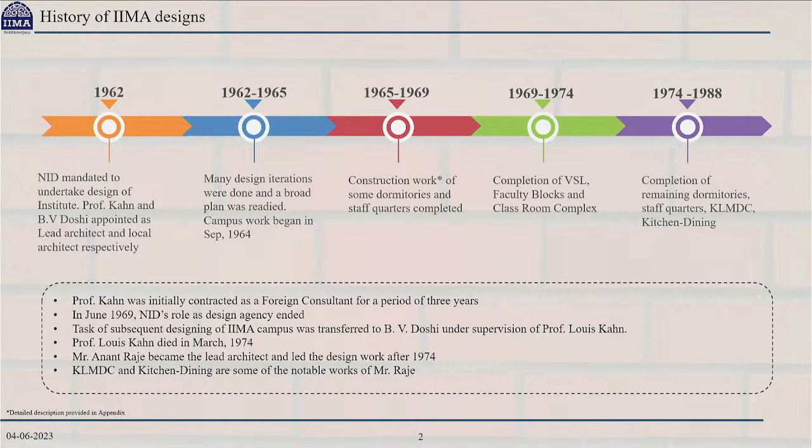Somewhere in 1974, unfortunately, we lost Professor Louis Kahn, and Mr. Anant Raje became the lead architect, leading the design from '74 onwards. Between '74 and 1988, we completed the KLMDC center, kitchen and dining area, and so forth.

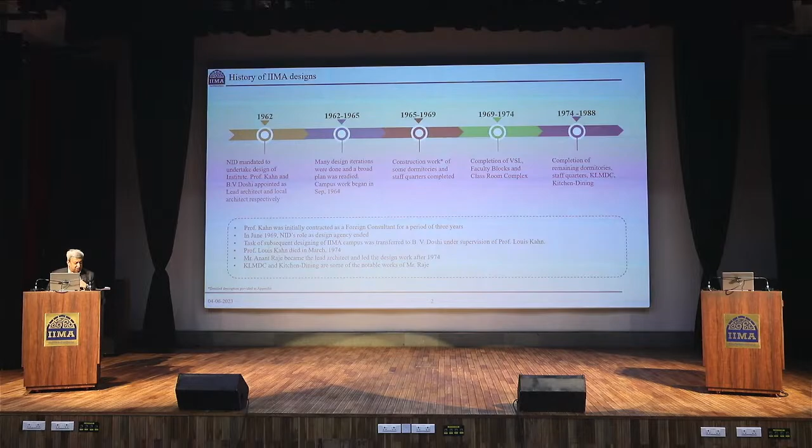So I think a lot of effort has gone behind creating this iconic building which we all see, and the legacy left behind by these people. We inherited a great infrastructure, and the institute became operational.

I met some people who were in the first or second batch here, and you all know that we were actually being taught in a tea shed at that moment.

So the sketch which was prepared in 1962 - if some of you visit the archival center today, you will find an actual picture of this sketch there. That sketch was the initial concept which was prepared.

It was driven by the convent building style, with more open areas that could be created. This was basically achieved through meeting and interaction areas, much larger passages, and collectively a lot of open areas. And finally the Louis Kahn Plaza came in, which we are all very, very proud of, and where a lot of our convocations - most of you have attended the convocation in the Louis Kahn Plaza.

So I think over a period of time, this design itself has become symbolic for IIM.

The problem started because of the bricks which were used. The first version which Mr. Kahn prepared was requiring an RCC building to be built. But the local Ahmedabad thinking, and the Indian thinking, was that bricks should be used more, not that.

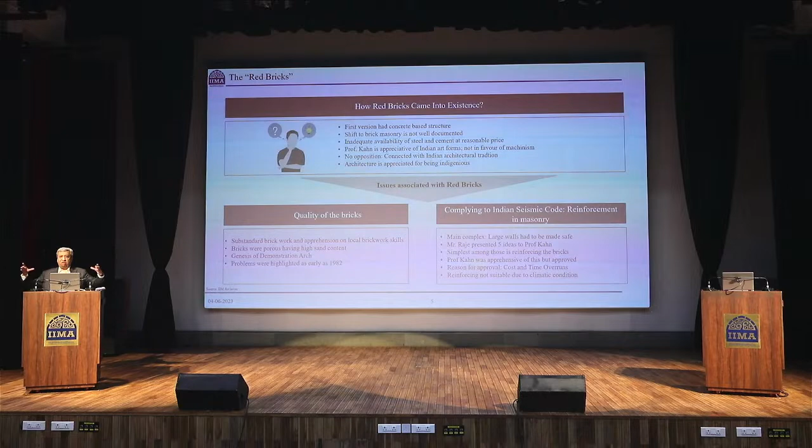When this brick structure was being created, it required reinforcement. So Louis Kahn suggested that while making a brick wall, you put four bricks in such a way that there is a hole in between. You put the rod into that and pour concrete.

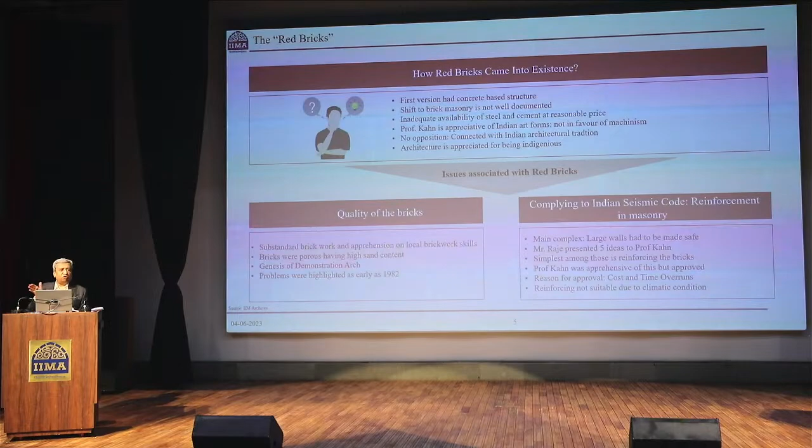At every period, something like 3 or 4 feet, you run a vertical small coping to make sure the structure becomes straight. At that time, cement and steel was very difficult to get in India, and it was expected the cost would go up. In the wisdom of everybody there at that time, they decided to go ahead, and some advised that only putting a rod will serve the purpose. Now the problem is the bricks in Ahmedabad were made out of sand and clay, and they are very porous in nature. Over a period, water seeped through the bricks, and the steel rods got eroded. Some of them protruded out, and that created huge damage to the whole building, including the top slabs, which had similar problems.

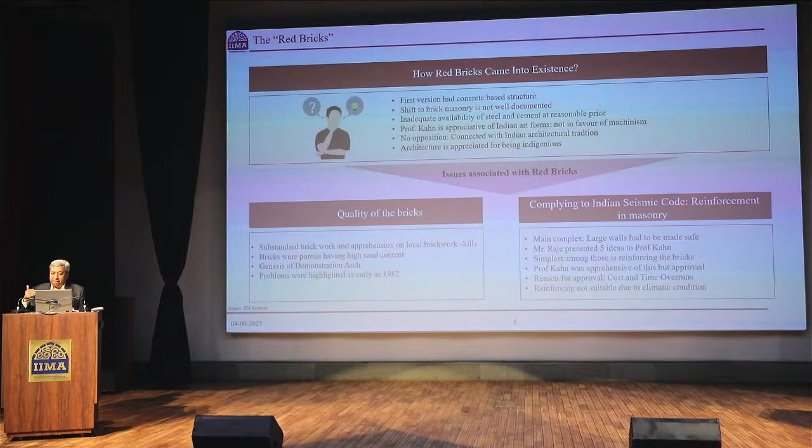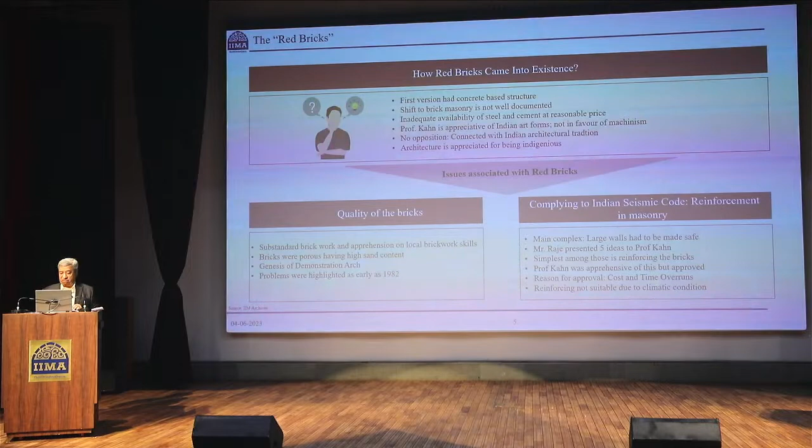Many things we can keep talking about, but the key message is we inherited a very iconic building, but unfortunately, because of the weather condition in Ahmedabad and the brick condition, the building started deteriorating in the first 10 years itself. In fact, in 1982 the building committee discussed the erosion. So since 1982 we have been talking about this problem. I don't want to blame anybody here. If somebody was not able to decide at that time, we are all responsible, because as senior concerned citizens of this institute, we should have helped them take the right decision, or even if they took the right decision, it didn't happen.

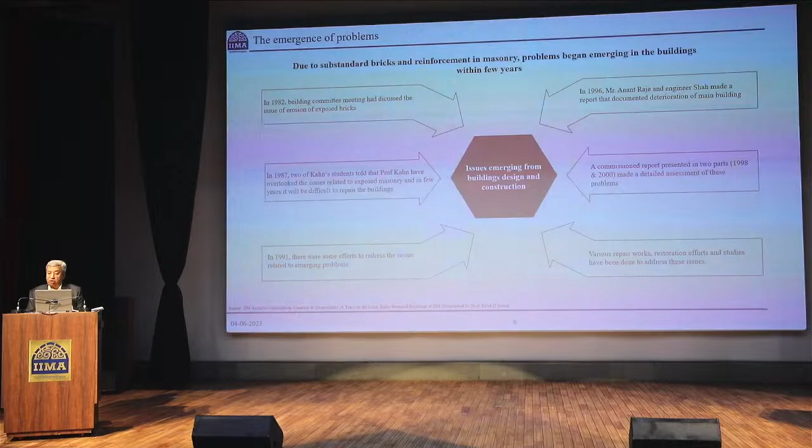Two Kahn students came in 1987, sent by Professor Kahn, to understand what's happening, and they said the exposed masonry would be difficult to repair in a few years. In 1991, efforts were made to redress the issue. In 1996, Mr. Anant Raje and Engineer Shah made a report documenting the deteriorating main building. Then we commissioned a report again in 2 parts, and so on, and every now and then some renovation work took place.

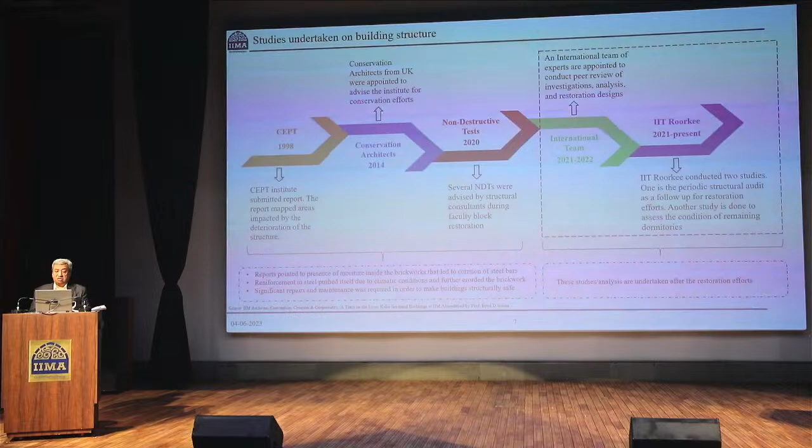We conducted several studies for the building structure. CEPT made a report in 1998. Subsequently, conservation architects from UK were hired in 2014, and they advised us with their report. Non-destructive tests were conducted in 2020, done as per the advice of the structural consultant at that time. An international team was invited in 2021-22 to have a look and suggest things, and in 2021 we also requested IIT Roorkee to help us with a report, and I'm happy they are here to share their findings with us.

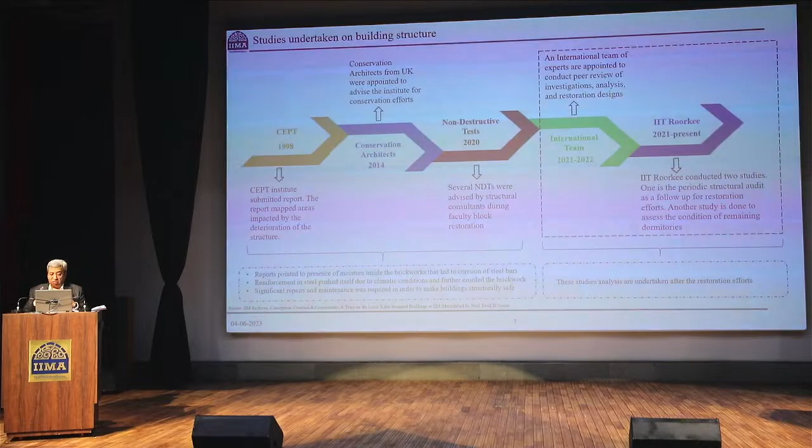Basically, the report pointed out the presence of moisture inside the brick, which has led to corrosion of bars. Reinforcement steel pushed itself out due to the climatic condition, and it has further eroded the brickwork. Significant repair and maintenance is required to make the building structurally safe.

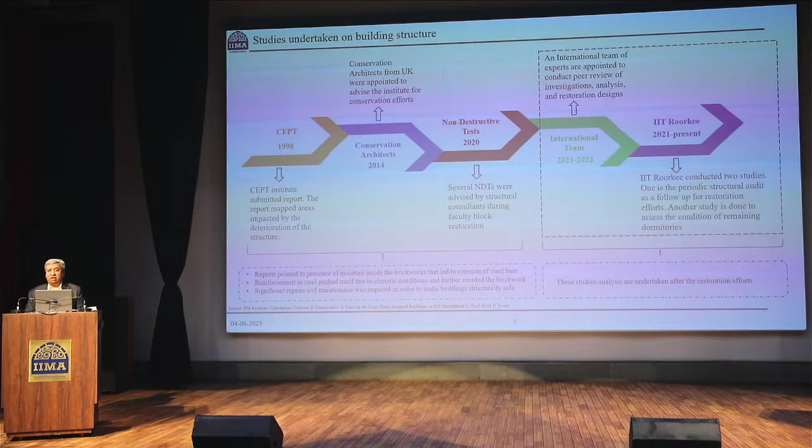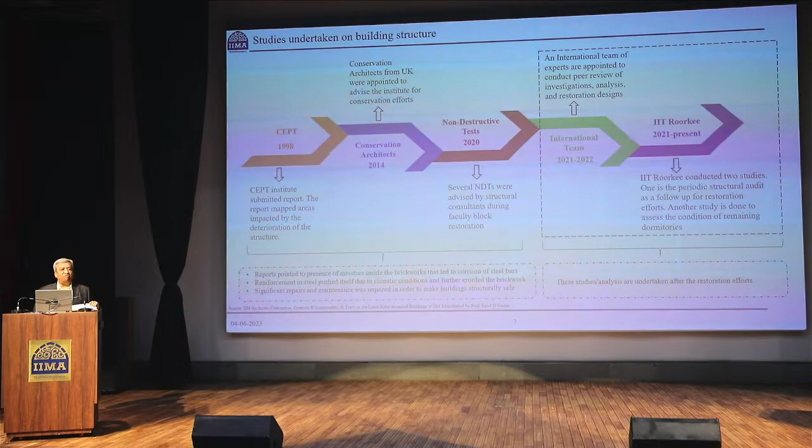These studies have ultimately said, and one thing I found in all those reports is everybody says this can be repaired - I agree, anything can be repaired. The question is nobody gives any guarantee whether it's good for 1 year, 2 years, or 3 years. They say no, after that you have to keep on maintaining. Now I personally, not being an engineer, don't understand, but some of you might be able to understand that you can't keep repairing and maintaining forever - someday the building's life will get over according to all these reports.

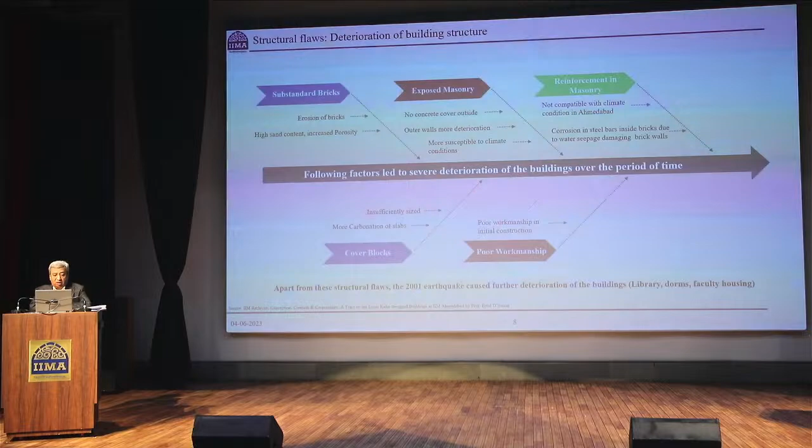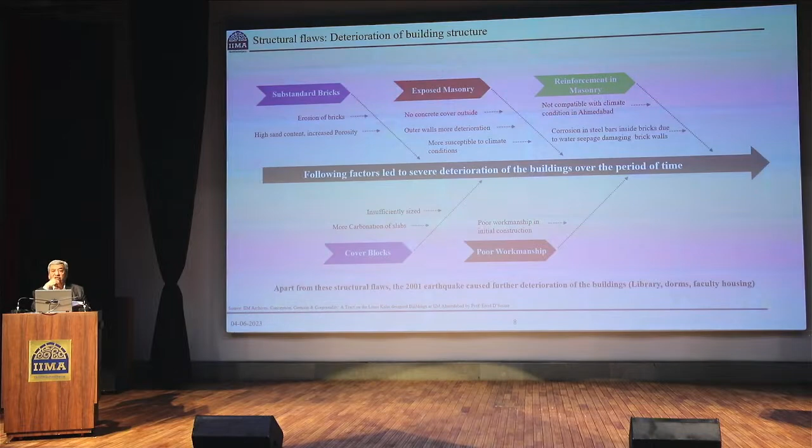But if you see what happened - library east and west side, an 8 foot wall cracked and fell. Service tower main arches at 90 feet height cracked and fell. Dormitory building staircase roof slab fell and walls were cracked. Dormitory building shaft wall cracked and fell. Extended parapet wall of faculty housing cracked and fell, and cracks were observed in various other areas. So this is how the concern started about the safety of people occupying this building.

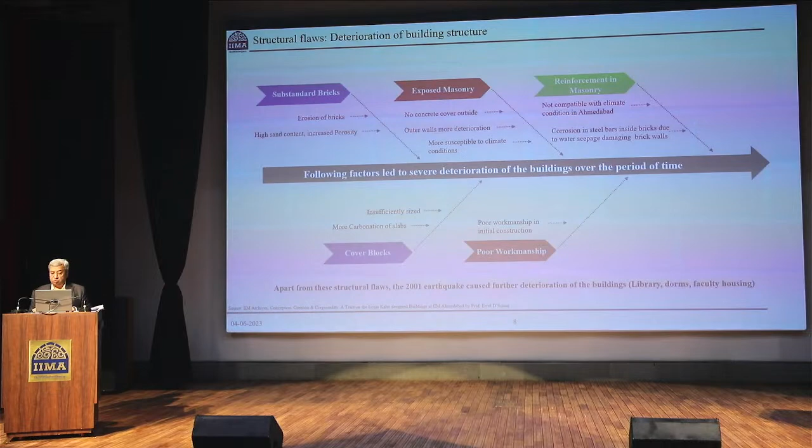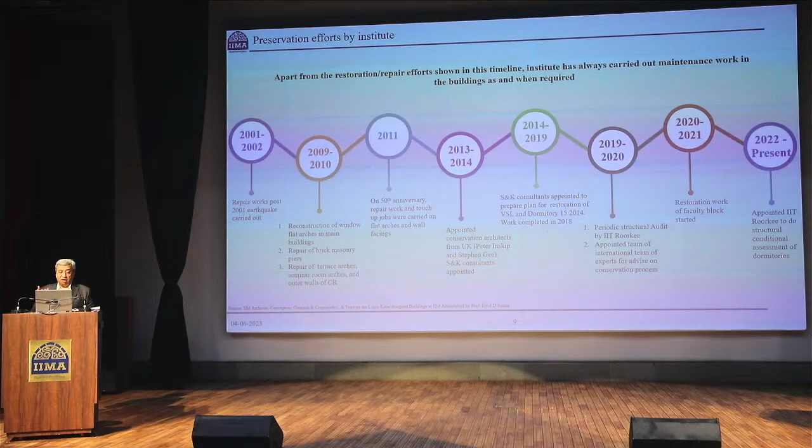Apart from the restoration efforts shown in the timeline, we also carried out maintenance work of the building at various times. For the past 2 decades, instead of one-time fixes, regular repairs, maintenance, and restoration efforts have been carried out, and this chart shows that repair works were done in 2001, reconstruction was done between 2009 and 2010, 50th anniversary repair work was done again in 2011. We appointed a UK consultant and S&K consultant were appointed for restoration. S&K consultant worked between 2014 and 2019, 5 years, to restore Vikram Sarabhai Library and one dorm.

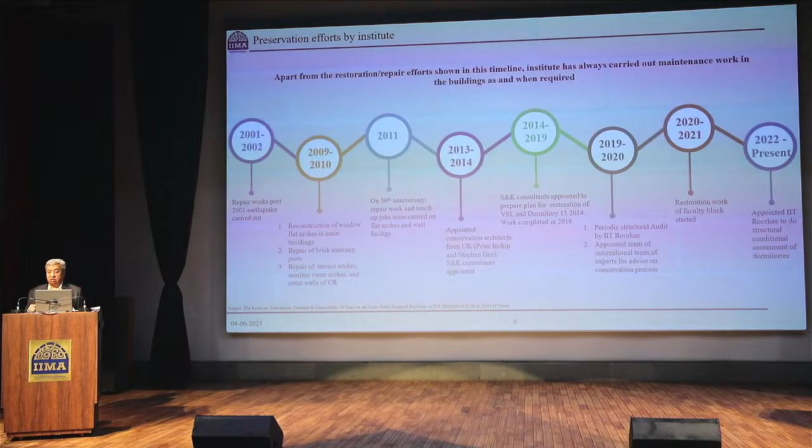Restoration work of the faculty block was also taken up in 2020-21. We found so many issues and problems while doing this, so we commissioned IIT Roorkee to help us understand this more. Now I want to show you some pictures to help you understand.

If you see here in this chart, this was the situation before restoration work done for the Vikram Sarabhai building. There were problems, cracks and whatnot, and then we decided that we'll do it. After restoration, within one year, we started getting cracks.

If you see here, some marks here, all of these are pipes put inside, and through that we are injecting to keep the building alive. And you see this thing, when this started happening, the restoration architects put support.

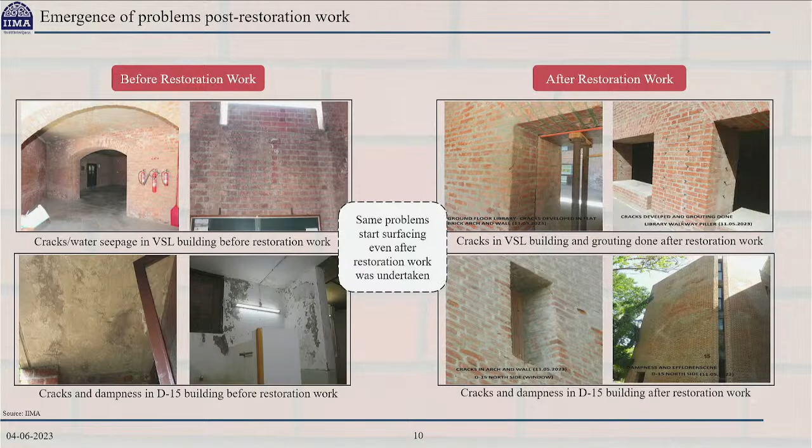This building had restoration done, and after some time it happened again, even with the D15 building as well. So we found that in spite of restoration, a lot of things happen. If you see, when restoration was done in the VSL building...

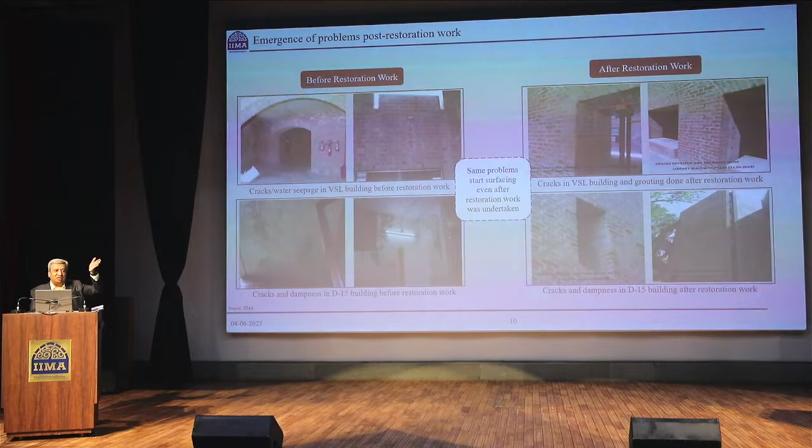Actually 2 slabs were broken. Half of the walls were broken, and new slabs were cast, and the walls were also constructed. So you could say it was rebuilding combined with restoration which was done, and in spite of that, we still have problems with that building.

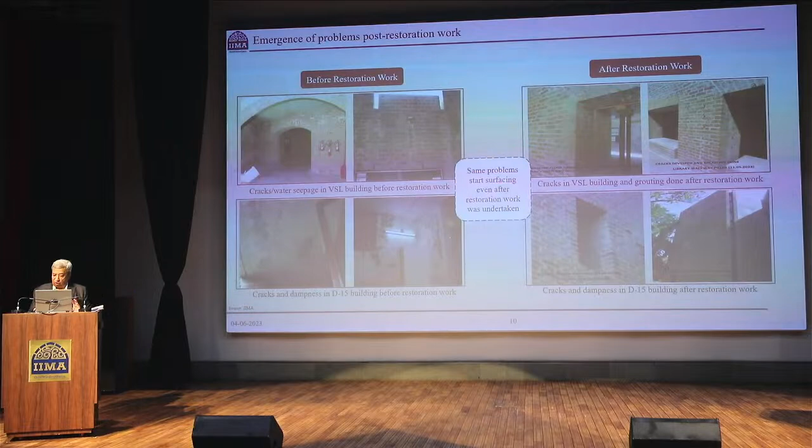Because of unsatisfactory work, we basically asked IIT Roorkee and also an international team to help us understand what we can really do. And the summary, as you see here, is that it's difficult to keep an architectural building intact and keep the building safe. Restoration will be technically impractical and ineffective, as we've seen now.

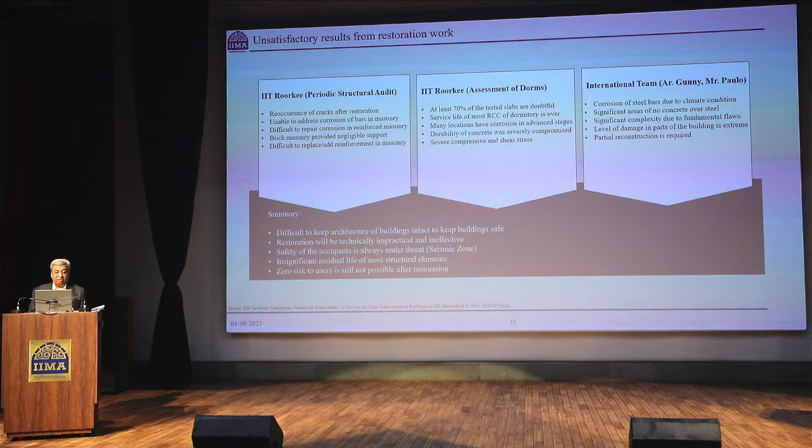We are now in a seismic zone. Ahmedabad is considered zone 4 now, and as a result, it is important to note that a severe earthquake can hit Ahmedabad and create a situation which could be dire. So ultimately, safety is becoming a major concern for all of us.

Now we need to really see and discuss here today what we can do. I have no fixed idea. If there is a great idea which is practical and safe for everybody who lives here, we are willing to adapt. Of course, we all have to understand that something very interesting happened, and I must tell you this.

You must know this. When the faculty block restoration work was started, there was an architect appointed earlier, and they had a structural engineer with them. Halfway through the building, when they saw that the VSL building had some problems, they changed the structural engineer, and a new structural engineer came in with completely different recommendations.

Every classroom, they told us to put 16 pillars inside. Now we said, if you put 16 pillars in the classroom, what will be the status of the classroom? What will happen to the people who are studying? So all these issues started coming up.

Not only that, the cost estimated by them was around 8,700 rupees per square feet. Now all of you know in your wisdom how much new building construction costs. So it was, of course, a solution which was not foolproof, because thereafter the same issue arises - you have to continuously maintain, you have to have a good maintenance program.

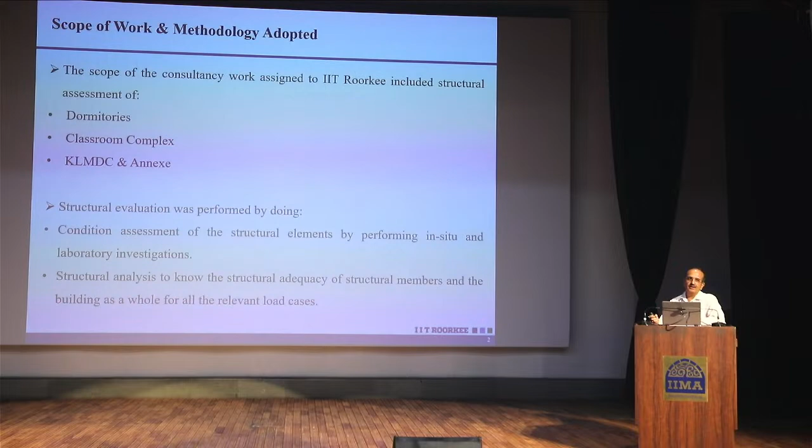The scope of work assigned to IIT Roorkee is shown here. It involved structural evaluation of dormitories and classroom complex building, and then KLMDC and its annexes. But let me tell you, this was awarded to us in the beginning of 2022, but before that we were also involved in some way in the other buildings as well.

First, around 2019, somebody called us from Ahmedabad or Bombay that they wanted some tests done on the faculty block also, because at that time the restoration work of the faculty block was going on. So we did some tests on the faculty block, and we have a fair amount of idea about its condition also.

Then in 2020 or 2021, we were awarded the work for periodical or routine assessment of two already restored buildings, the library building and dormitory 15, because the consultant employed to design the restoration started with dormitory 15 and the library. When it was completed, they mentioned it should be visited or inspected every 2 to 3 years as part of periodic assessment.

Towards that end, we were asked to do investigations on the library building and Dorm 15 also. So we have a fair amount of idea about the condition of these two buildings also, what was there before restoration and after restoration, how they have been behaving.

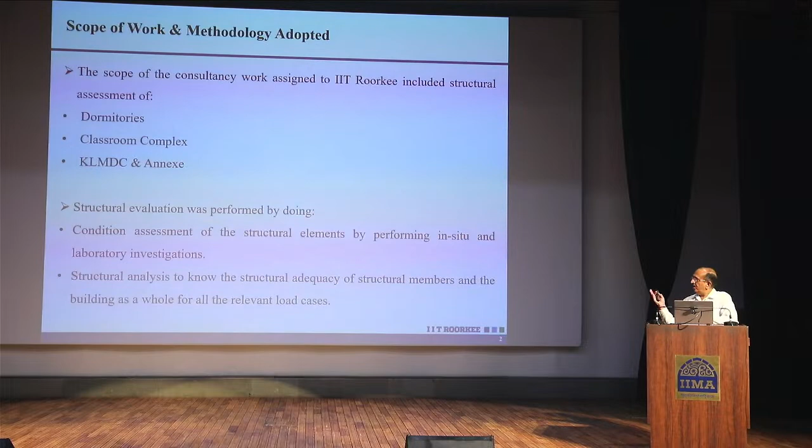For these three categories of buildings, we have done detailed investigations. Till date, we have completed dormitories in all respects, and right now we are doing investigations on the classroom complex and KLMDC, which is still underway. So overall, we have got a proper idea about the structural condition of all the buildings in the old campus of IIM Ahmedabad.

So how did we proceed? What was the methodology adopted? As you can see, in any old structure, when you are asked to do structural assessment, there are two main components of that study.

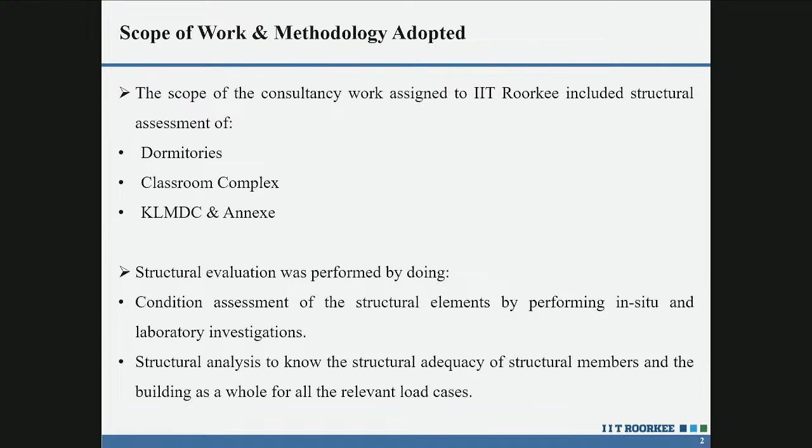One is to investigate or determine the structural soundness of different elements of the building, and the building as a whole, meaning whether any deterioration has happened. Aging will happen, but has it occurred beyond acceptable limits or not? In other words, you can say understanding the health of the building. That was one part of doing assessment.

The second part is to check the structural safety of the building as a whole under all load cases, meaning gravity loads, dead loads, live loads, and all lateral loads like earthquake loads, wind loads, maybe some other kinds of loads. That is always the second part.

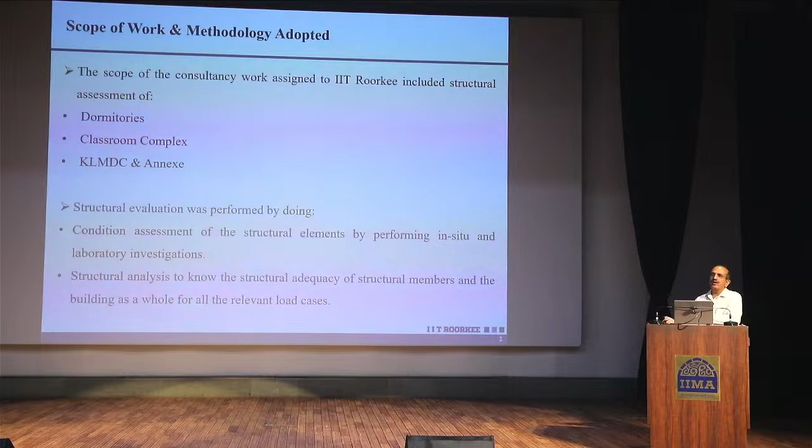Once these two things are done on any existing building, then you can say with all confidence that this building is safe or needs some kind of repair. The entire idea about the overall condition of the building can be gauged after doing both of these things.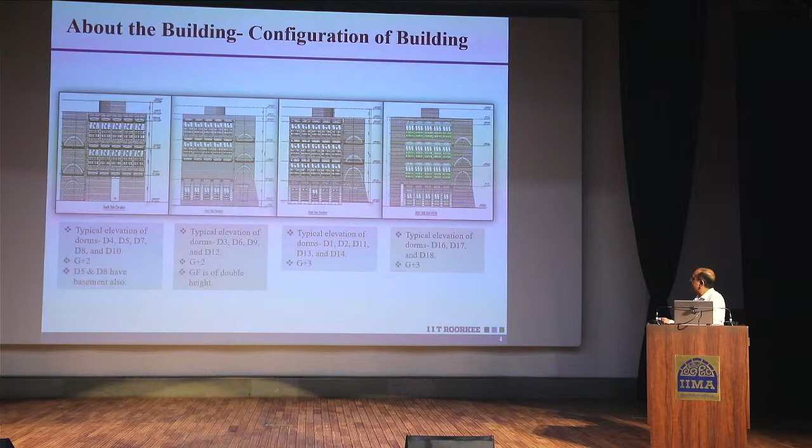In D3, D6, D9, D12 they are also ground plus 2 stories, and they have a ground floor which is of double height - you know this better than me since most of you have lived here. The typical elevation of the other dormitories is ground plus 3, and the same applies to 16, 17, 18, which were built slightly later, also ground plus 3.

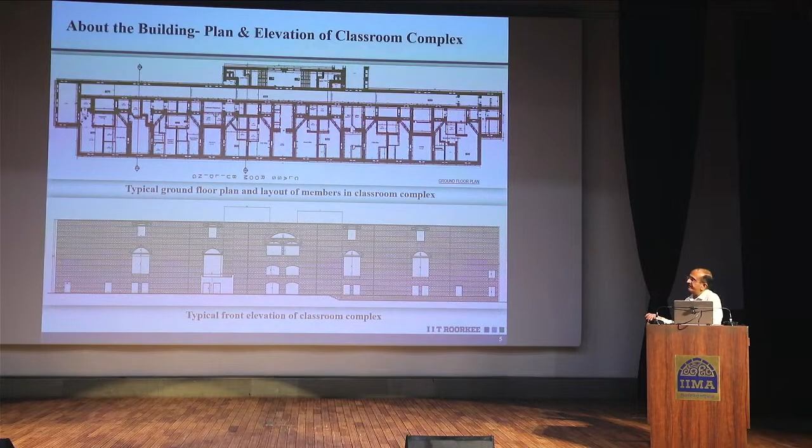And this is the plan view of the classroom building, which we are doing right now. The elevation, and this is the plan.

Now, in these buildings, what are the different structural elements? Means how the loads travel, what are the load paths. So as we know that for gravity loads and lateral loads, the load paths are required to transfer the load to the ground, to the foundation. So what are the structural elements which participate in passing those loads?

And in all these buildings, you have got masonry walls, which are both unreinforced and reinforced. In classroom complex, faculty block, library, and some of the dormitories, these are reinforced masonry walls, vertical elements.

And also in the walls, wherever openings are there - these kinds of things I am saying - over the openings, either you have flat arches, somewhere semicircular arches, somewhere oculus openings. So these are the vertical elements, and then to transfer the load over the opening, you have these elements. So they finally transfer the vertical load to the foundation, right? And as I said, they are both unreinforced and reinforced.

And then as far as horizontal elements are concerned, like slabs, they are all reinforced concrete. And all these elements are exposed. When I say exposed, means on reinforced concrete, we don't have any plaster. And similarly in masonry also, there was no plaster. That is one language of architecture.

So these different categories of structural elements are described further. Reinforced cement concrete elements were staircases, slabs - of course staircases also, they were all RCC - and few parapet walls. And unreinforced masonry elements were basically in some dormitories where walls and piers were unreinforced, where the reinforcement was not there, and that is why they are still doing better than wherever reinforcement was there.

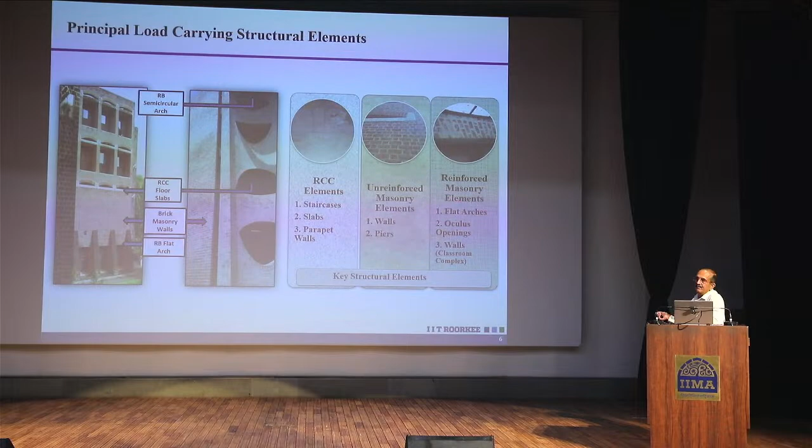And in reinforced masonry, which we typically call RB - reinforced brick masonry elements - you have flat arches, oculus openings, walls in classroom complex, faculty block.

Now, any building, when I say service behavior - because as we all know, all living and non-living things age with time. Everything has got age. So buildings, structures also age with time. So if something is aging in usual terms, it's fine. If something is aging prematurely, that is something we don't agree to, we don't accept.

How does this aging happen? Aging happens for different kinds of materials in a different way. So unreinforced masonry will age at a different pace because aging will depend on the member's own material and capacity as well as the external environment. So masonry, unreinforced masonry will age differently because its behavior is different. Reinforced masonry will degrade at a faster rate because reinforcement is the culprit. And reinforced cement concrete will also age at a faster rate.

All these things age with time, and then after some time we start seeing diseases. In medical parlance, exactly the same thing - you can draw an analogy. So as in our human body, if we do not take care of our body, after some time we'll have some kind of disease, and then those diseases manifest themselves in some form like fever or something going wrong - blood pressure, sugar, all those things. The same way here also.

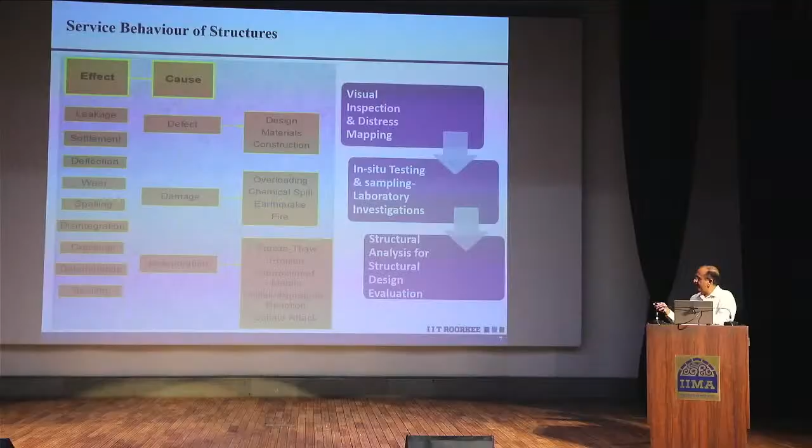So these are the diseases, these are the symptoms of distress. So you will start seeing some cracks, some kind of corrosion, spalling, seepage, all those things happening. It means something is going wrong inside. So we need to understand what is there, what is the cause of the problem.

So causes we can divide into three categories. Defects are generally when some error has been done in the design right in the beginning or in construction. That is not the main cause - of course, as Mr. Patel mentioned, yes, there was some problem in the bricks and also construction technique, because Louis Kahn has proposed the use of reinforcing bars to be protected with concrete. That probably has not happened. So some problems were there, so it has some role to play. But then if defects are there, yes, problems will start happening sooner than later.

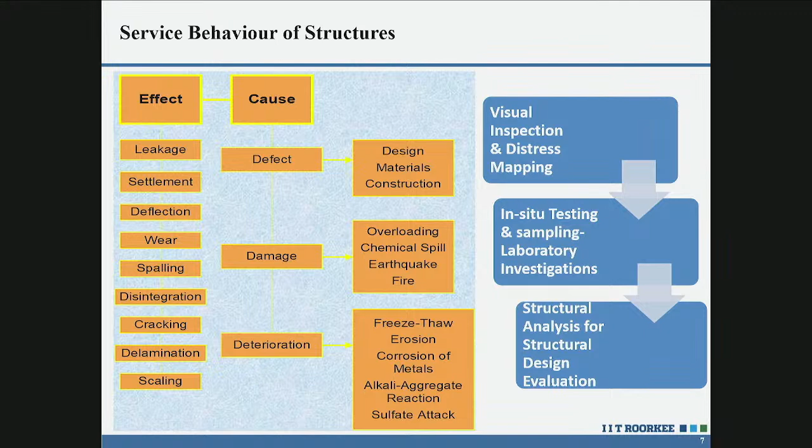Then damages generally happen when you have some kind of overloading, earthquake, some kind of overloading. Then deterioration is aging - aging is bound to happen, as I said, everything has age. So aging happens, and the aging, as I said, will depend upon the materials or elements' own capacity as well as external environment.

External environments in our cities are unfortunately changing and becoming harsher—not only to us as human beings, but also to structures. So we do not have the luxury of building exposed masonry, especially brick masonry, and concrete anymore. We need to protect them, giving some kind of protective coating if we want elongated service life. So aging will happen. Aging is bound to happen.

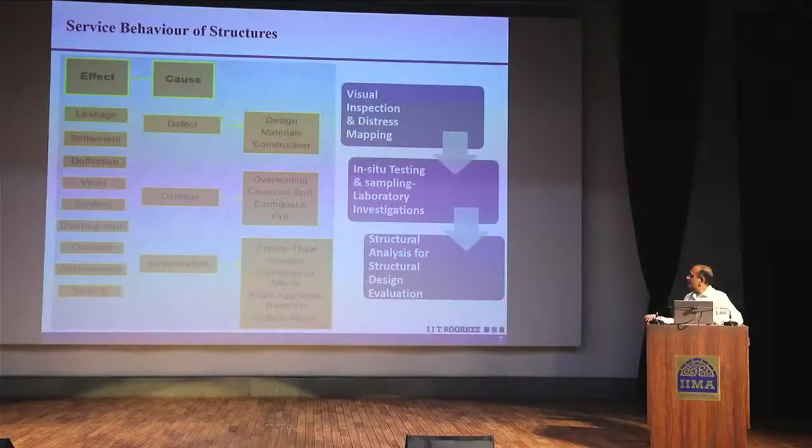In order to understand the first component of our overall investigation, which was to understand the structural soundness or health of the building, we started with visual inspection and distress mapping, and then undertook detailed in situ, meaning in-place, testing. We took samples and did a lot of investigation in our laboratory at IIT Roorkee, and then carried out structural analysis involving all the required relevant load cases to know the structural adequacy of the members.

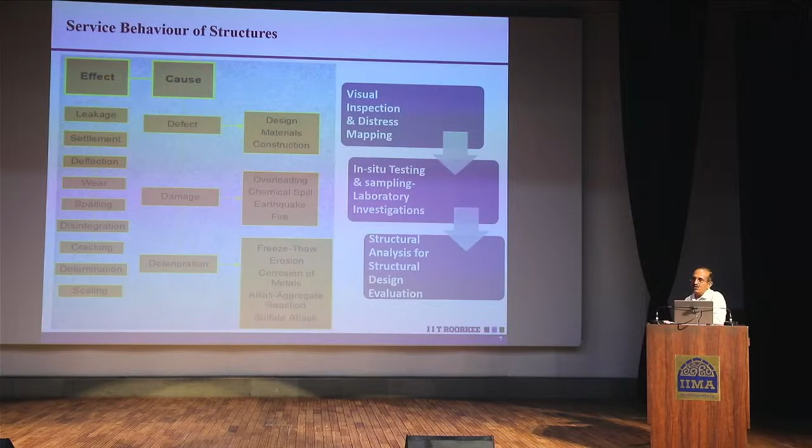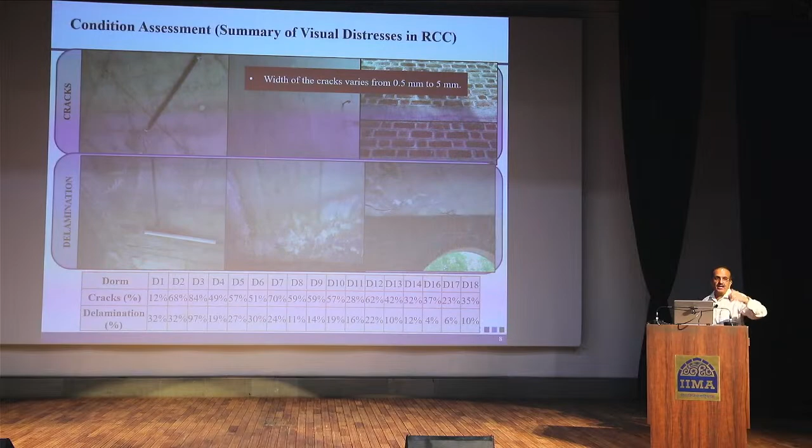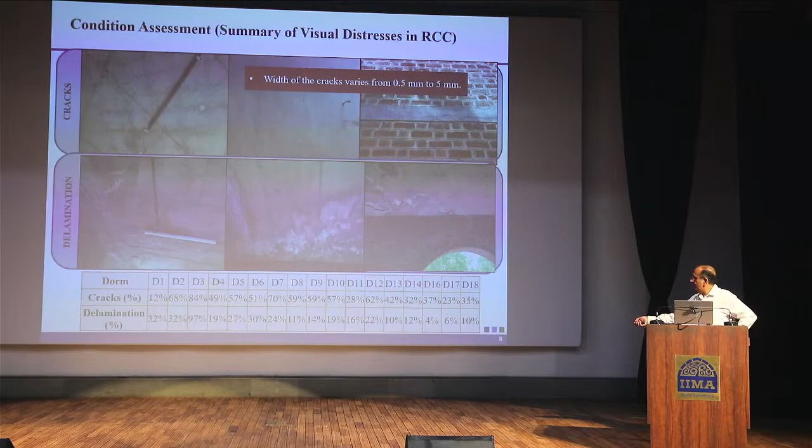Delamination means the cover concrete has become loose and separated because of corrosion. A significant number of elements had delamination also. Keep in mind, delamination and spalling happen when the problem has reached an advanced stage, because when something starts manifesting on the surface, it means the underlying problem has progressed to a great extent. Almost 50% of the elements had cracks in most of the dormitories, and the same was true in other buildings, which I'll show you too.

This is RCC where you can see the spalling—these are other kinds of symptoms. Some of the elements were already repaired, meaning patch repairs were done, which obviously is not the proper way. Even in those patch repairs, cracks have started again, because patch repairs address the effect, not the cause. The cause—corrosion of reinforcement—is still going on.

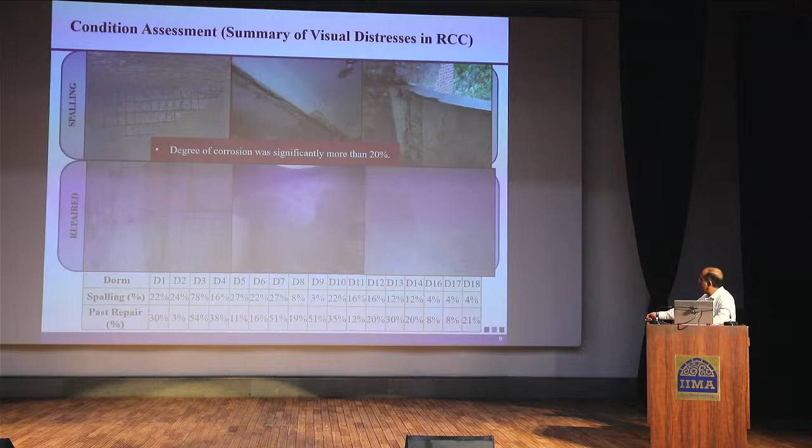As you can see in this summary, spalling has occurred in many of the reinforced concrete elements—spalling being the next stage of progress after cracking and delamination, when something falls apart. In many places we also saw instances of past repair.

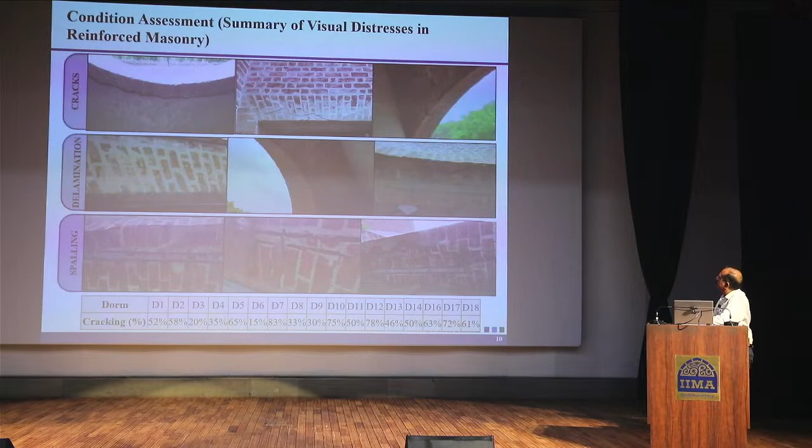Now coming to the reinforced masonry elements, which you might have seen in many buildings—there are serious cracks. In all the openings, arches, and flat arches, there were serious wide cracks, and in some places the reinforcement is visible, having corroded, expanded, and swollen, which has also led to spalling. Cracking in these reinforced brick elements ranged as high as 83% of the elements cracked. Some dormitories might show only 20%, but majority are at 50, 60, 70, 80, 90%—meaning they are at an advanced stage of this problem.

Now coming to unreinforced masonry—as I said, the culprit was reinforcement.

Unreinforced masonry, wherever it was, mostly in some of the walls in dorm buildings, is slightly better than the other types of elements, but they also have problems in the form of seepage or efflorescence. They finally lead to disintegration of the mortar joints, and the implication will be loss in the structural capacity of the masonry walls, because unreinforced masonry is also a structural element here. These are all load bearing walls. So as you can see, rising damp from the ground causes problems.

Then at some of the locations, mortar has in fact leached out. It has disintegrated and gone out. In fact, we did some studies where through a non-destructive test, we found out the cavities in the mortar.

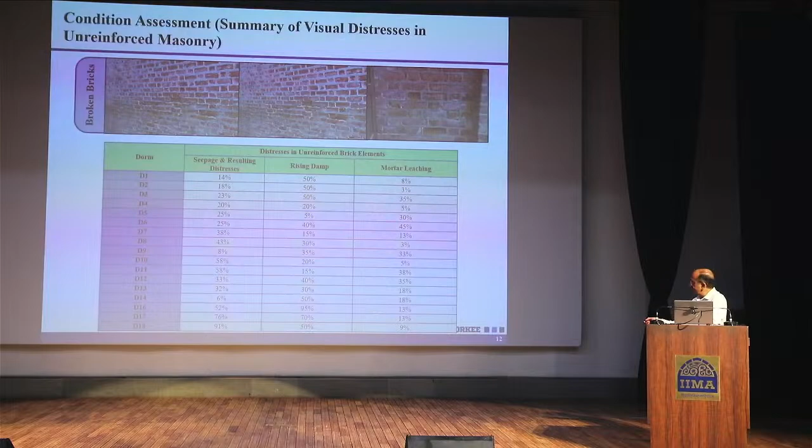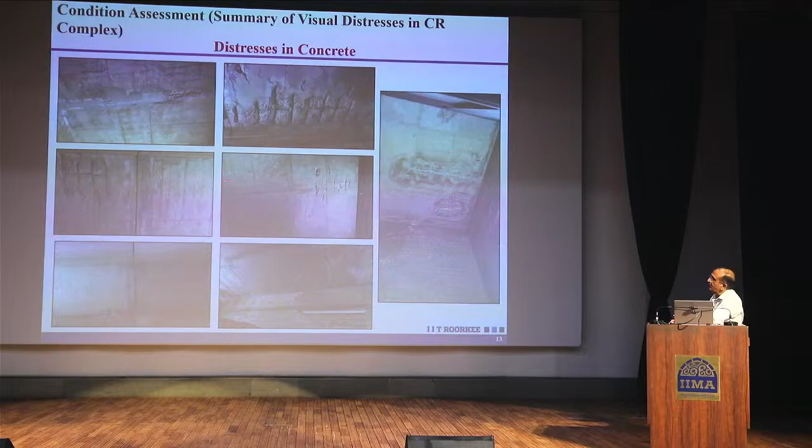Now, in the classroom complex, although we are still underway doing this work, it has got serious issues because here all elements are reinforced brick or reinforced concrete, and the majority of them are under serious distress. You can see some locations have cracks, falling.

As you can see here, spalled concrete in RCC is a kind of a limit state, because when you design something, you always put a limit state. This is the limit I can allow my building to go to. And many of the codes world over say that when the corrosion has reached 10%, 20%, that can be the limit. And for a very, very important structure, they say that initiation of corrosion, when corrosion has not yet manifested itself on the surface.

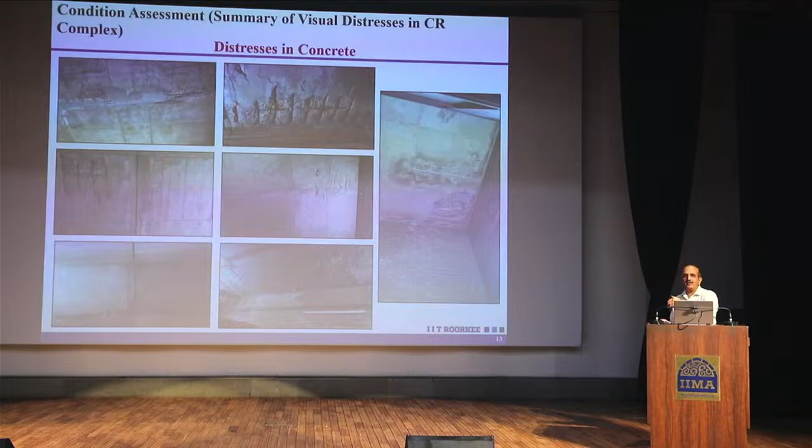In some structures, people even say that is end of life. But that may be the limit state for very, very important structures like nuclear power plants. In buildings also, generally the limit state is 10%, 20% corrosion, and spalling is way beyond that limit - spalling is well after that. So we have gone past that particular limit state in most of the elements in the classroom complex.

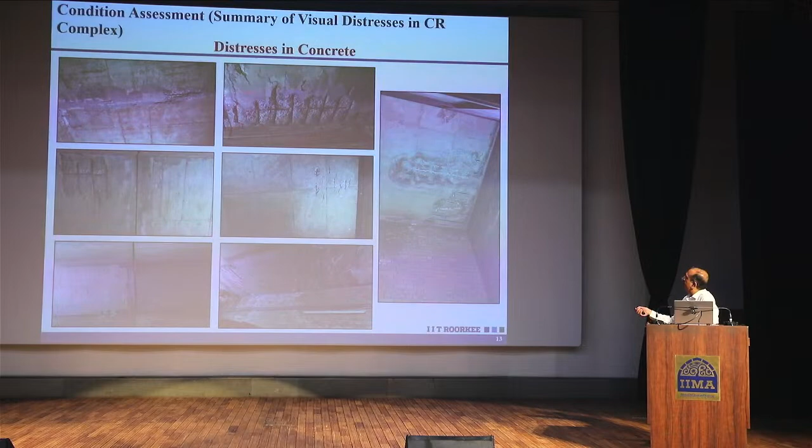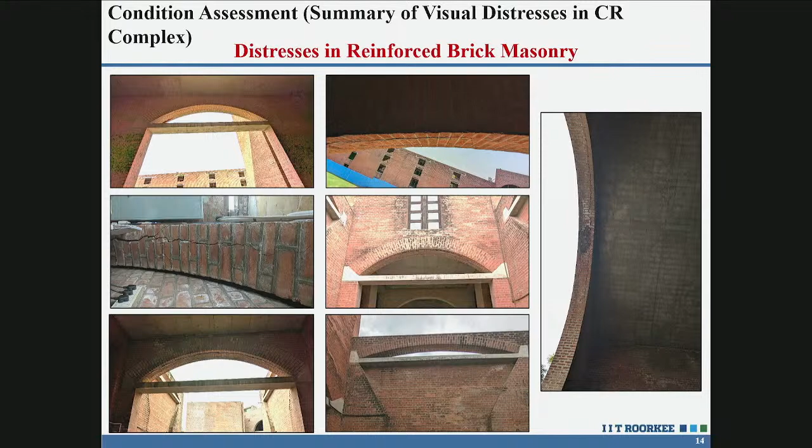And the same was true in RB, reinforced brick elements, in the classroom complex - they're all arches, walls. Of course, mostly arches have problems. And the summary is here - this is the summary of the classroom complex.

Then, to complete these investigations, again in medical parlance, one is clinical examination - I described that; inspection is clinical examination. Then you have to do some radiological or pathological tests also. So on the structures also, the same way, we did tests, and many of these tests are same as we do on our bodies. X-rays, CT scans - they are done on structures also. So we did the investigations.

This particular test, which is a pulse velocity test, enables you to know the integrity or condition of this concrete element. It tells you whether there are micro cracks or cavities inside the concrete or not. This is a summary for different dormitories here. Generally, our current code says that this pulse velocity value should be more than 3.75 kilometers per second. Older codes used to say it should be more than 3.

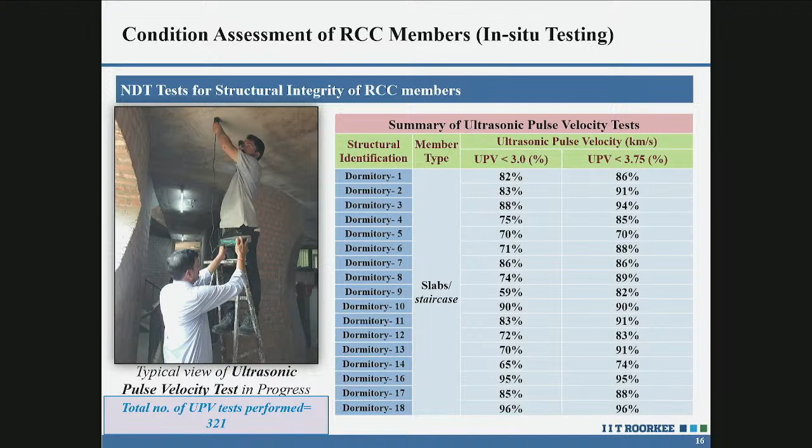So if I apply that, then you can see all slabs, staircases - how many of them are below this? More than 70-80% are showing the value less than 3. So this tells that all the elements in the dormitory, RC elements, have some cracks, micro cracks, some problem, obviously triggered by the reinforcement corrosion, and that is why there are problems. And also the initial grade of concrete which was used in all the buildings - at that time that was the grade, I'm not saying why it was used. At that time, as per the knowledge prevalent then, M15 was the grade people used to use.

They used M15 grade, and nowadays M15 grade is not allowed. In RCC, we should have M20 or more, depending upon your requirement. So here M15 grade was used.

In our clinical examination, we saw that there are corrosion related issues. So obviously, to support that, we need to do the tests also. These are the tests which we performed to understand the cause of the corrosion and also to know the extent of the corrosion.

Corrosion analyzer tests are there, which will tell you the rate of corrosion, half cell potential, resistivity of the concrete. Lower the resistivity tells you that the environment is acidic, corrosion must be going on. So this test enables that.

170 tests were performed on dormitories, to understand the cause of the problem. Corrosion is generally caused by carbonation or chlorides. Chlorides generally dominate in seashore areas, but in mainland or inland portions, generally in the cities, carbonation induces or starts the corrosion. So carbonation was suspected, and that turned out to be true.

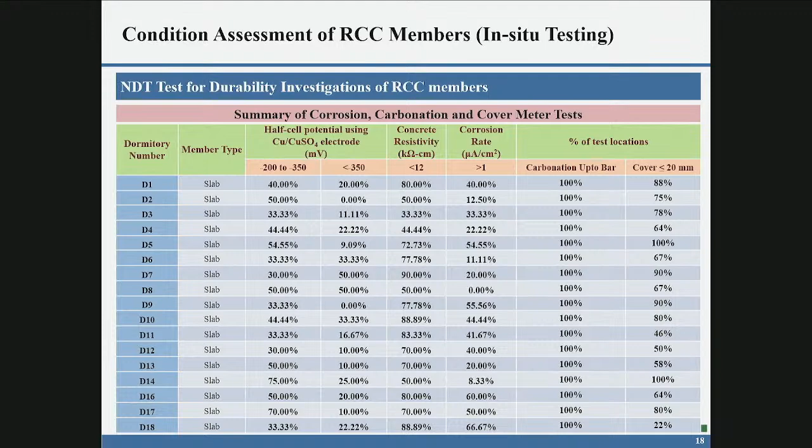And then we also found for the RCC element the service life. The service life was determined for different reliability levels. As I said, generally for such low cover, at 10% corrosion, we expect the cracking to happen. That may be the limit state.

Or maybe generally people say, or we have also done that, if the cover everything is fine, if corrosion has reached 20%, then it starts affecting the structural performance, structural properties, and that could be the end of life - we can say that as a limit state. We found the service life of both the cases, depending on the rate of corrosion, because obviously, whenever you find service life, you have to consider for which exposure condition, for which demand you are doing.

So demand is the environmental exposure, which is carbonation induced corrosion here. For that, we determined it ranged for 20%, from 31 to 54 years. So 50 years are already over. And then for 10%, it is in this range, because it will come slightly early.

So with this current rate of carbonation, the way things are moving, if you do the same study after 10 years, that time it will show you 30 years against 54 years, because carbonation levels, corrosion, the environment demand will also change with passage of time.

As you can see here, for reinforced masonry also we did tests, but they were all invasive, because all the investigation tests which are now available are mostly for reinforced concrete. For RB, there is no test which can tell you exactly what the carbonation is. Of course it was visible everywhere, but the tests shown in the previous slide are not applicable to RB.

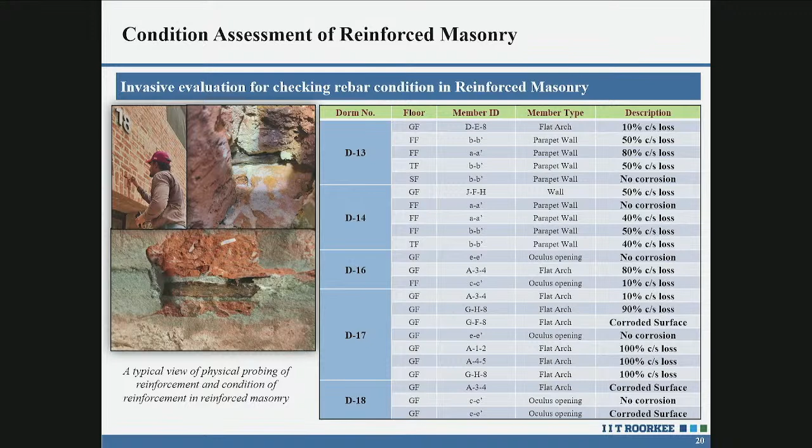So as you can see, in many of the elements we found the corrosion degree. What is the residual diameter? Original, and what is the residual? The subtraction divided by original into 100 gives us the degree of corrosion. As you can see, it was 100% in many of the cases, 10% in some of the cases.

And then we did some chemical tests also to find out what is the cause. Again, the mortar in the masonry has also carbonated, and that has also led to the corrosion, and even chlorides were more than the acceptable limit.

Generally chlorides are coming from the sea, they are usually found in seashore areas, but nowadays if you use underground water or some kind of thing, through splashes chlorides can also enter. In fact they were also found in many locations. So when both club together, carbonation and chlorides, then things progress at a very fast rate.

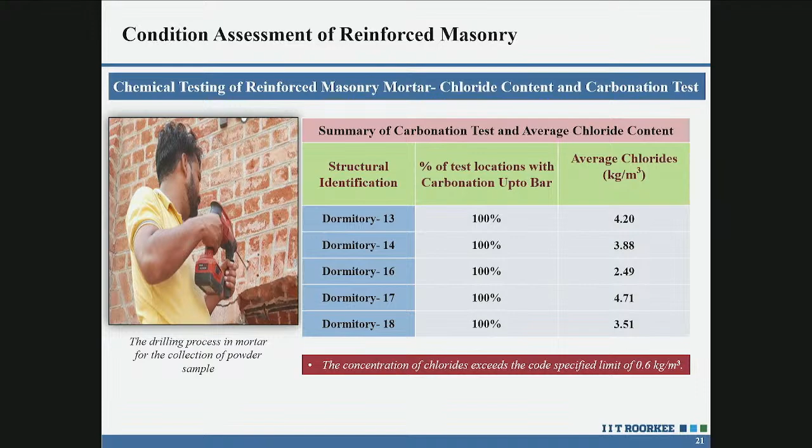Then in unreinforced masonry, corrosion is not a problem. So we found what is its actual structural performance, structural properties. That is done by doing in-situ structural tests.

We call them double flat jack tests. In-situ shear strength tests are also determined, but these are some results of flat jack tests, which help us in determining the compressive strength, Poisson's ratio, modulus loss - these are all structural properties. We did those tests and determined the strength, and these strengths were used finally in the structural analysis.

But then as we go by their absolute value, they are not very high, they are below par. We did many tests on the faculty block also, although it was not in the current scope. Previously, as I said, we did. There is also a similar situation.

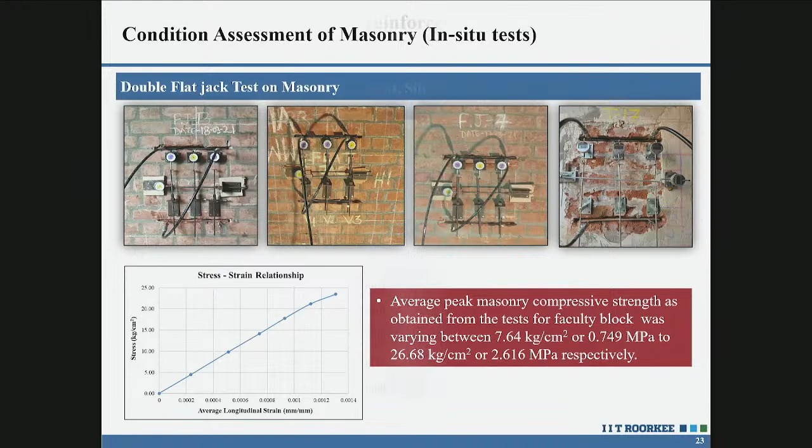We did this test before grouting. The consultant proposed the grouting - before grouting and after grouting - and there was hardly any increase in the strength of the masonry. Too much grout was going in because of the porous nature of the masonry. Over a period of time, the mortar has leached out.

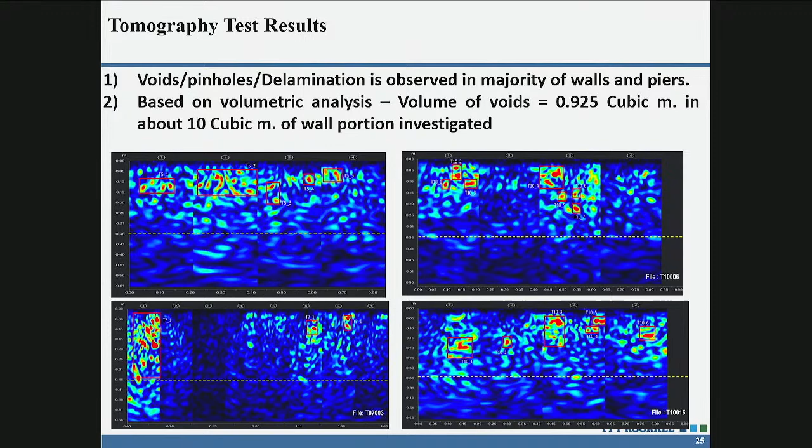So now my colleague Professor Yogendra Singh will tell you about the seismic safety, structural adequacy of the buildings as a whole.

Thank you, Professor Sharma. Good morning. I will discuss the structural investigation, that is the safety of the structure as a whole. It will be interesting to give you a little background about the history of earthquake engineering, because it has a parallel with the history of IIMA.

The first earthquake safety code came in 1962. The discussion about earthquake safety of structures started in India around 1959. In 1962 the code came, and the construction considered earthquake as one of the concerns in the design.

We do not have access to any document which tells us whether earthquake was considered in analysis or not. But the use of reinforced brick masonry itself suggests earthquake was a concern, because otherwise unreinforced brick masonry would be fair enough. But when we talk about earthquake, unreinforced masonry is generally not considered adequate.

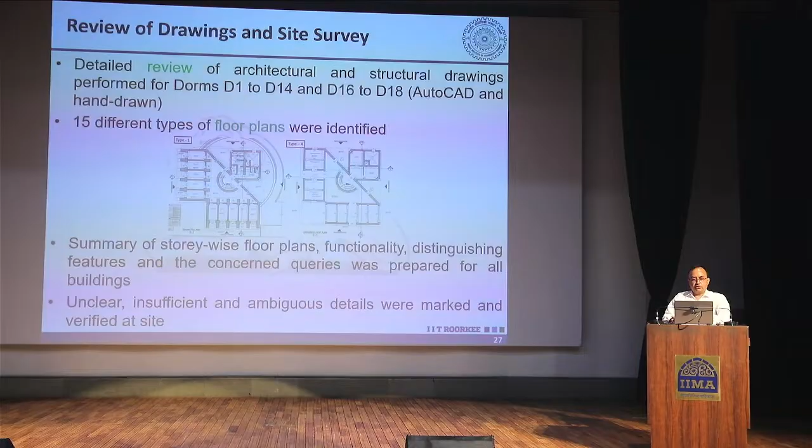In context of some elements, the documents were not adequate, and we were not getting enough information for modeling and simulation of those elements. So we completed that through a site visit. When our team visited the site, we measured all those elements for which information was not available in the drawings. We considered all 18 dormitories except one, dormitory 15, which was already prepared.

We selected dormitory 1 as the typical representative dormitory for our analysis. The basis of selecting dormitory 1 was that, based on our visual inspection, it was expected to have the best resistance against earthquake, having maximum structural wall density, and its configuration was such that this was the strongest building. So we thought we would first analyze the strongest building, and then proceed further. If this building itself is not safe, there is no point in investigating the other buildings. So we selected that one.

A structural assessment was performed using finite element analysis in a commercial software commonly used in the industry, ETABS. We used homogenized continuum modeling - these are technical terms, please excuse me if you're not familiar with these, but still we can work with it. We used thin shell elements, a type of finite element to model RCC slabs as well as brick masonry.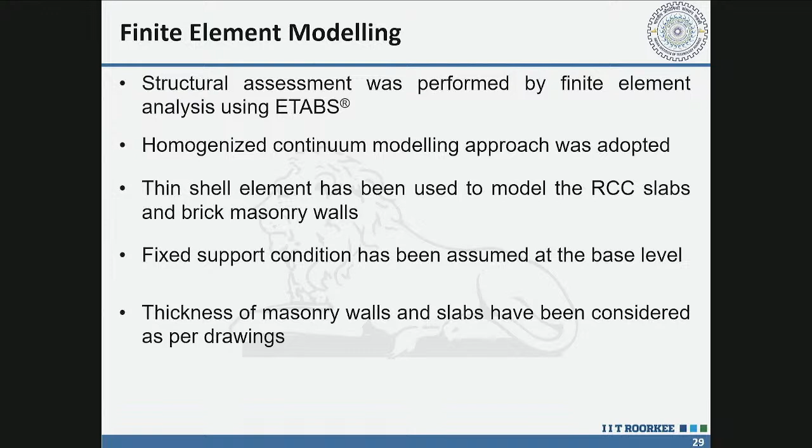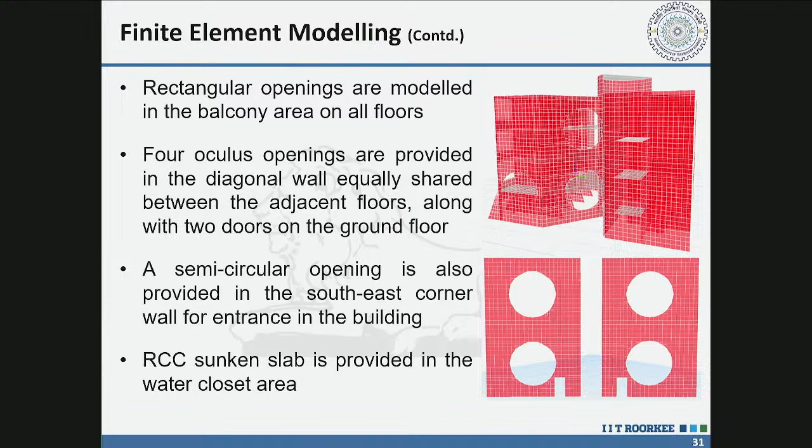On the ground floor you might have seen some buttresses, the inclined masonry walls - those were considered in our model, along with all openings including the semicircular staircase. Rectangular openings, circular openings, oculus openings, semicircular openings, and sunken slabs near toilet areas were also considered explicitly. In other words, whatever geometry is there, we try to model it faithfully, considering all openings present. At some places an architectural gap, a vertical slit-like element separating the wall, was also modeled in our finite element model.

Here we can see some elevations we have shown, and the purpose is to understand what material is available to resist the horizontal and vertical loads. Horizontal load comes from earthquake, and vertical load comes from gravity. When analyzing any building, we have to consider all the forces which are expected.

There is a thumb rule for earthquake safety: if we have an unreinforced masonry building, the total opening in a single story building should not be more than 50% of the length of the wall. If we provide too many openings in a masonry wall, it becomes weak and may not be safe for earthquake. We can do detailed finite element calculations, but the thumb rule is that in a single story building the opening should not be more than half the length, and in a 3-story building, not more than 1/3 of the length of the wall.

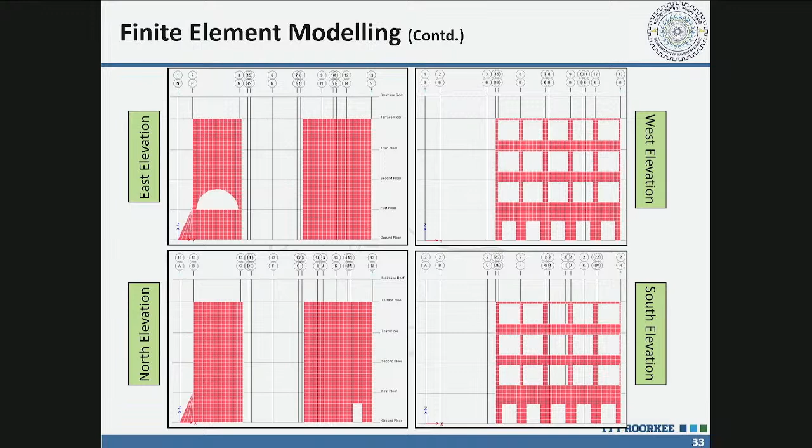But here we can see from these elevations that a lot of openings are there, and incidentally these walls are unreinforced - they don't have reinforcement except some element near the opening.

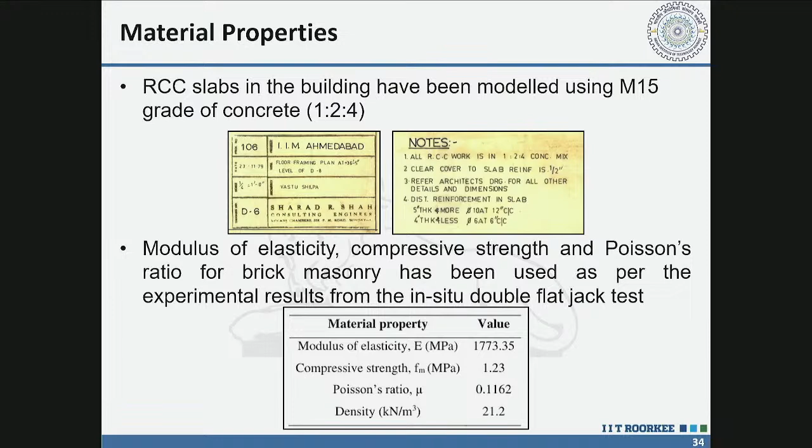We also tried to do a simulation of these buildings to get the strength or quality of material these walls are made of. For slabs, as my colleague explained, we consider M15 based on our literature study, available drawings, and our tests. The properties of masonry were considered based on our own in-situ testing - we estimated modulus of elasticity, compressive strength, Poisson's ratio, and density, taken as present at the site.

We considered the self weight as the source of gravity load, the vertical load, estimated based on drawings and actual dimensions of different elements. The live load, coming from uses of the building, was taken as per IS 875, the IS standard for live load. Self weight and live load from the staircase was distributed to the nearby walls - these are some assumptions and simplifications made in our analysis. Superimposed load for finishing on floor and roof was taken as 1.5 kilonewton per meter square.

Wind load was also calculated as per IS 875, and as with low rise buildings, it is the earthquake load which governs, not wind load. Both have horizontal effect on the building - the forces are in horizontal direction. We calculated wind load, but it came out to be less than the earthquake force.

The seismic load has been applied using the response spectrum method of IS 1893, and Ahmedabad is in zone 3. For unreinforced masonry building, the response reduction factor R is 1.5. Considering it as an important building - all educational institutes are put in the category of important buildings - an importance factor of 1.5 was used in calculating the earthquake force.

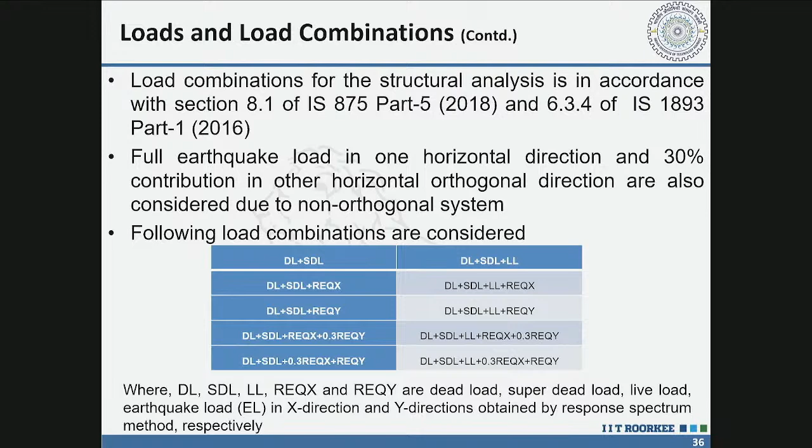Different load cases, the gravity load and earthquake load, are to be combined. Earthquake can come in any of the three directions, both horizontal directions as well as vertical direction. So we have to combine earthquake in different directions, and the code suggests a 100-30 combination rule: when we consider 100% earthquake in one direction, we expect 30% in the other direction. That rule we have used for different load combinations in analysis.

We calculated the stresses obtained from application of these loads through finite element analysis, and compared them with the permissible stress. The permissible stress we obtained from tests conducted came out to be 0.37 megapascal in compression. So the maximum strength in masonry is in compression, when subjected to a compressive load.

Tension can also develop due to the horizontal force coming because of earthquake, and the tensile strength we estimated for 1:5 cement mortar is 0.07 megapascal as per the masonry code IS 1905. The permissible shear stress, again estimated as per IS 1905, came out to be 0.147 megapascal.

While calculating shear strength, we also need the compressive force acting, because it is a friction-like behavior - there is cohesion as well as whatever vertical load is acting, and that also contributes to shear strength. This was taken based on the gravity load, because earthquake causes increase in vertical stresses in some parts of the structure and tension in other parts, so the average value remains what we get from gravity. That's what we considered.

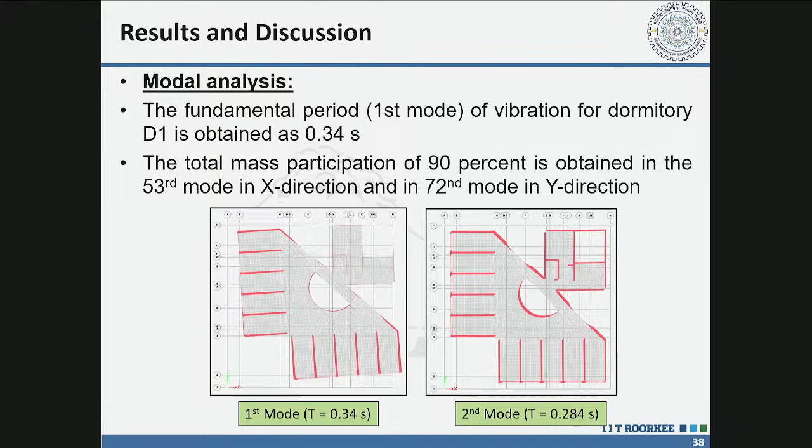The period came out to be 0.34 seconds. We also compared this with the empirical formula given in the code, which gives a period of 0.30 seconds. So the analysis and code-based empirical formula both gave periods very close to each other.

The code also says we have to consider as many modes as needed to achieve at least 90% mass participation of the total mass of the building. We found that roughly 72 modes were required for mass participation in both horizontal directions, x and y. These x and y are just tentative directions - usually we consider them along the principal axis of the building.

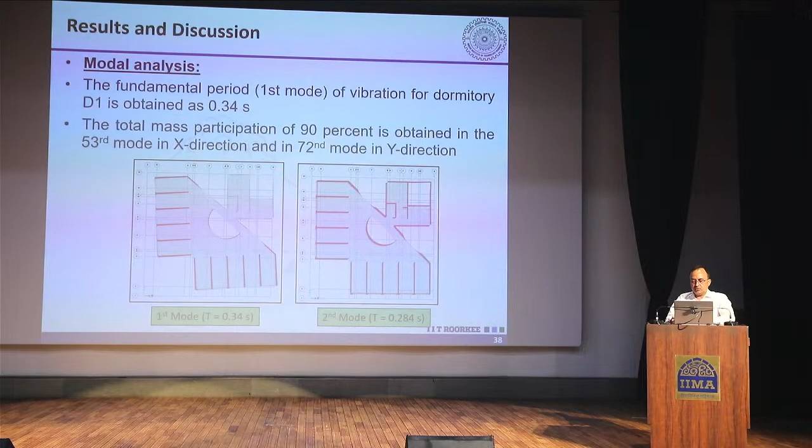In the first three modes, we got participation in both directions, meaning the modes were coupled. For this shape of building, where we have non-orthogonal components - some walls perpendicular to each other, some at an angle - a torsional coupling is expected, and that was indicated by the dynamic analysis.

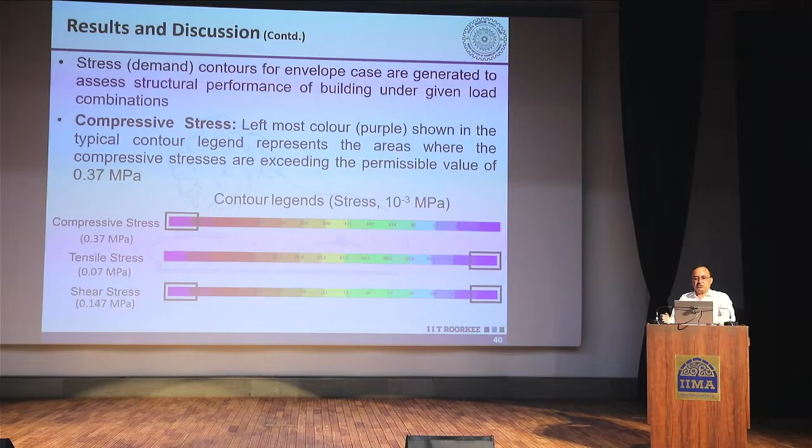Finally, we have to check the stress. For checking the stresses, we developed contours of stresses over the whole structure, all walls, and checked compressive stress, tensile stress, and shear stress - all three possible stresses. I will show those using a color code.

The stresses are shown by color code. Here we see compressive stress more than 0.37 megapascal, shown in pink color. Tensile stress exceeding our limit of 0.07 is given by blue color. So in compressive stress, wherever we see this color, it shows the stress has exceeded the permissible value. In case of shear, stress can exceed in both positive and negative directions, and here the pink as well as blue color, wherever occurring, shows that stresses have exceeded.

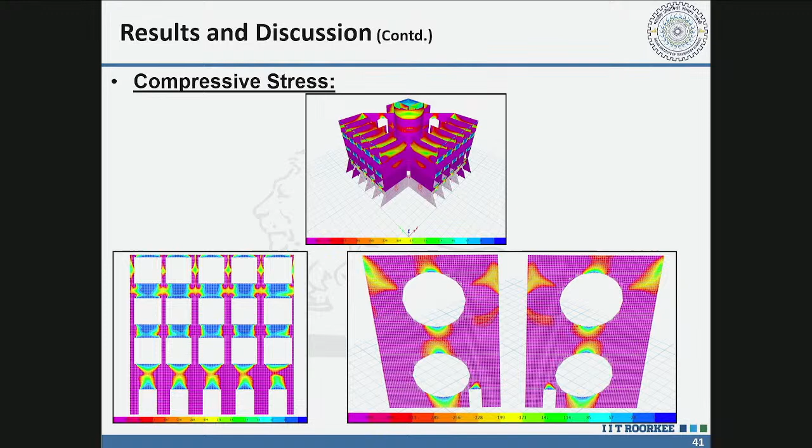So what we see here is the compressive stress over the structure, and wherever you see this pink color, that is in excess of the permissible stress. We can see over almost the whole of the wall, only where we see green, yellow, or red color is the portion where the permissible stresses are within the limit. Rest everywhere, the stresses are more than the permissible value. So most portions of the walls are having stresses in excess of what is permitted, and these stresses have been obtained as per the current code, as per the level of earthquake force specified in the current code.

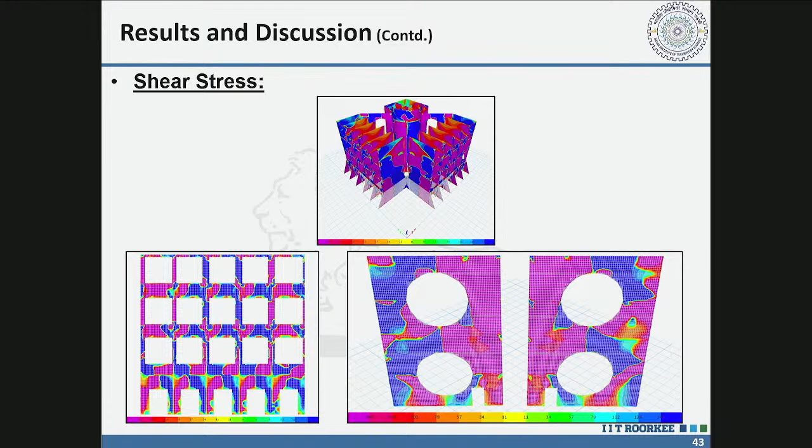So what we see is that the buildings are not safe. Even if we restore those buildings, those are not going to be safe for the current practice of earthquake resistant design. So to conclude, first my colleague presented about the in situ condition, or the health of the structure.

What we found is that the in situ investigation which we conducted on RCC and masonry in the dormitory indicates that there is loss in structural soundness and integrity of both materials. The masonry as well as RCC has been affected by aging, and the integrity in both materials has been compromised.

Then based on site observations, in situ and laboratory testing, and numerical analysis for relevant structural loads as per the current code, it can be concluded that the buildings are highly vulnerable for earthquakes expected in this zone, zone 3 of Ahmedabad. So for this zone, these are highly vulnerable.

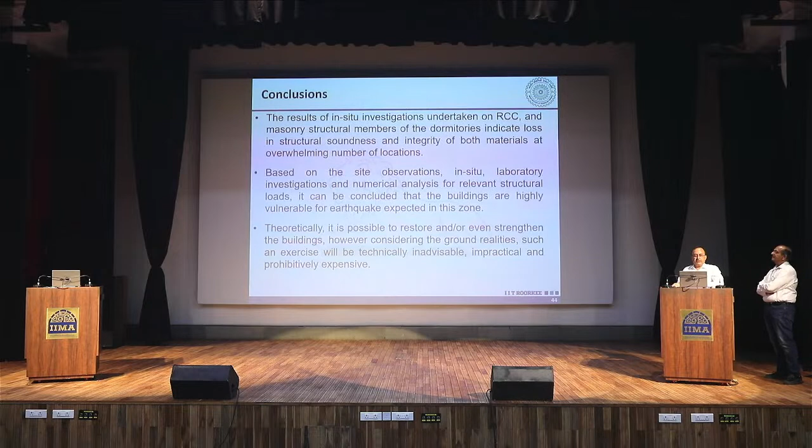Theoretically, we can retrofit or strengthen and even improve. We can make any building safe for current loads also, but the actual ground reality in these buildings is such that this exercise is going to be technically very challenging, especially removing the corroded reinforcement which is already there in the walls, and replacing it with new reinforcement. That is going to be very challenging.

It will require almost reconstruction of all the walls, and there will be many practical issues, and it is going to be very expensive. It may be more expensive than new construction of the same area. So that's what we feel, and we are open for questions now. Why did we say this?

Reason for saying it is technically challenging, or inadvisable and impractical and expensive, as Professor Singh has explained: if we go one by one, we have seen that reinforced concrete elements like slabs and staircases have gone, gone because of corrosion. In some places, the corrosion is in the initiation phase; maybe in the next 4 or 5 years, they will also meet the same fate as we have seen in the peripheral members. And the remaining members in the corridors, circulation areas, and washrooms, the problems there are serious. The members have already lived their life.

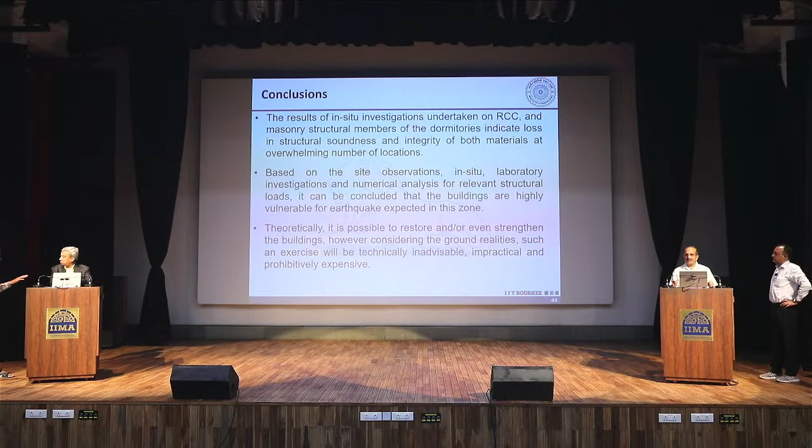So the solution for such thin elements, which we call RCC slabs, is not to repair, because repair for thin elements is possible only if the repair is localized. Here we need to reconstruct them, because repair will be far more costly than reconstruction. So all slabs or RCC elements need to be reconstructed.

Coming to reinforced brick masonry elements, RB elements are still more challenging because their repair is not well understood. Nobody is able to tell, because that is the reason why in previous restoration works the corrosion of bars in the RB has not been touched. They tried some kind of grouting, but that has not worked because cracks have again reoccurred in the library and Dorm 15, at many locations. So again the only possibility is to reconstruct the RB elements also, meaning all flat arches, circular arches, and openings have to be reconstructed.

The third thing is unreinforced masonry, where there is some possibility of restoration, which you can do by grouting, or a grouting can be done.

But then again, grouting - we have seen in the faculty block that while doing grouting, sometimes the pressures went beyond the limit, and that has further caused delamination or cracking. Even if we do all these things, we'll still get the same structure that was built at that time, which will have inherent structural deficiencies, as Professor Singh has explained.

So on one hand we are saying restoration is not possible, very costly, challenging, impractical. Still, even if we do it some way, we will get the same adequacy of structure that we had in the 60s or 70s - it will have inherent structural deficiency, and it will be unsafe with respect to earthquake loads. We have to live with the risk.

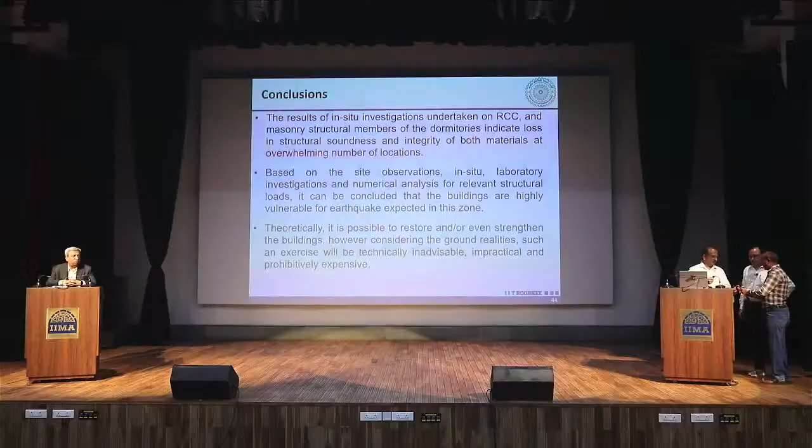I didn't get your question. What I mean to say is, which you said at that time M15 was used loose - 1:2:4 ratio - and M20 at that time used to be 1:1.5:3 ratio.

Yes, M20 - I just said that nowadays codes allow concrete grade to be more than M20. We are not allowed to use M15 in structural applications right now. That is what I had said during my presentation. So what I mean to say is that was not inferior even by today's concept.

Okay, I think there is some other confusion - he will tell. If you are saying that 1:2:4 is better than M20, no. It was good - M15 at that time is fine. I'm not saying why it was used. We are just saying that now that concrete has also deteriorated extensively. But I simply said that nowadays M15 is not allowed; it should be minimum M20 now.